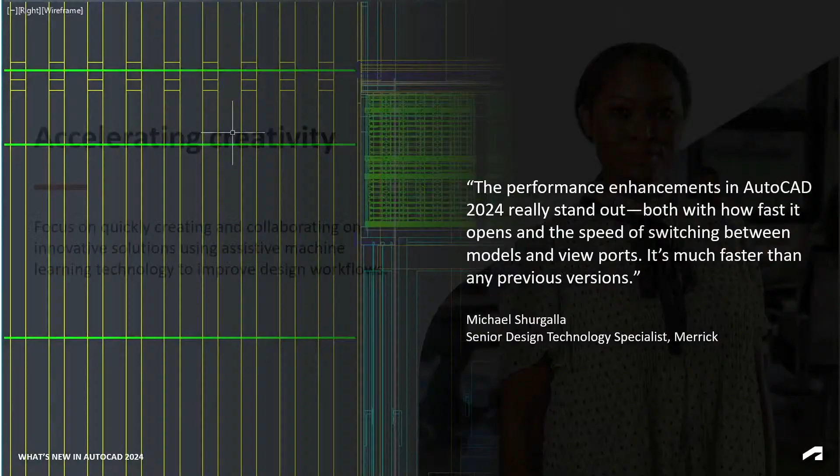With the technology enhancements within AutoCAD, it basically speeds things up when you open and switch between models, taking advantage of newer processing power, etc. So it's much faster than older releases.

The first enhancement I want to highlight is activity insights. It's just a switch that you turn on, and it allows you to record your actions, who did what, in a database outside of AutoCAD. If one person deletes something, it gets recorded, and everybody knows that person worked on the drawing at that date and time, as well as anybody else after that. It basically records who does what.

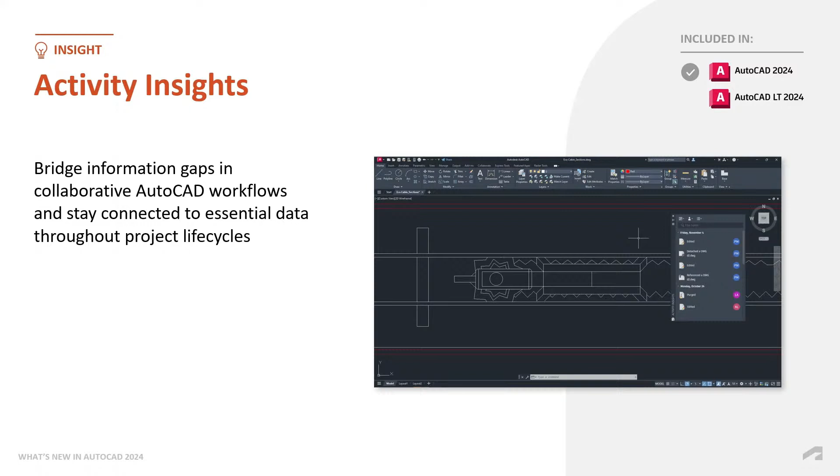It's got a user input, so it knows who opened that drawing and then did what in that drawing. If you rename the drawing in Windows Explorer, it'll also record that in the database. So it runs in the background, and you've got a history of who did what on that drawing, which is great for troubleshooting.

There's also an advisor that learns what you do and suggests how you can improve your workflow. If you're making copies, or copying and then rotating, it might suggest a tool called rotate and copy, which is a sub-command within the rotate command, to copy an object and rotate it. So it might suggest insights to improve productivity.

Some of the automation has been sped up, especially the counting of blocks, as well as the placement and reusing of content. That's been tested, and it's much faster than in previous releases.

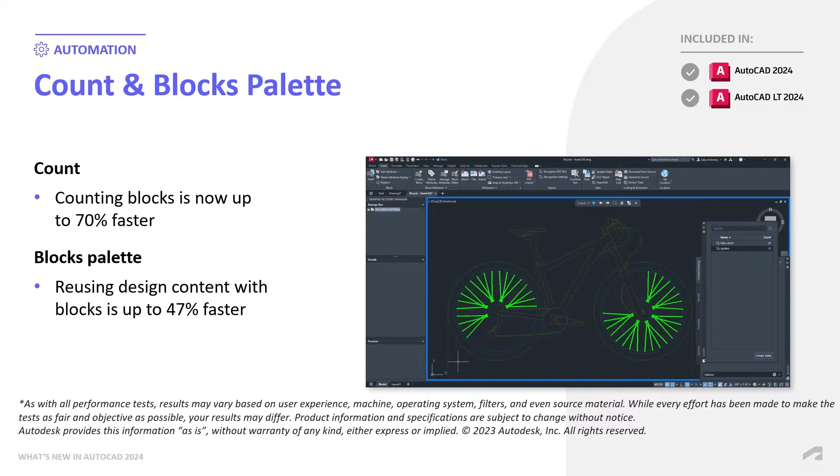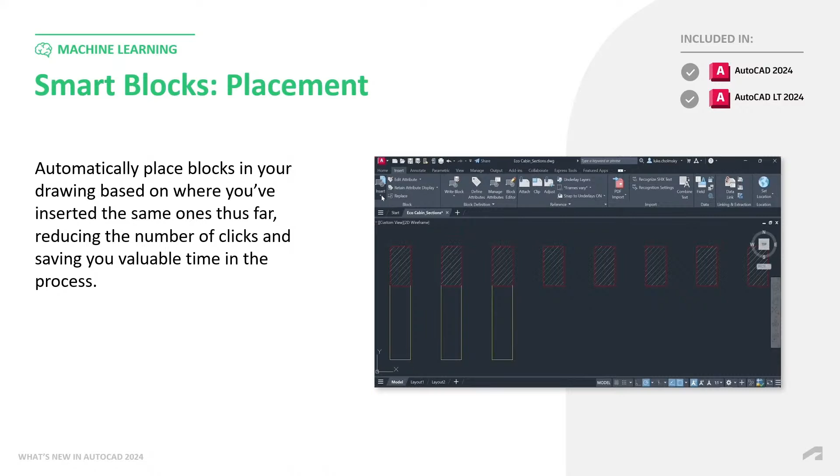There's a great tool. As you tediously place components, AutoCAD actually learns how you place them, and in future, it will just snap into the right spot. This allows you to very quickly add similar blocks that you've placed before. It learns what you're doing and wants to help you place those items in future, snapping to the correct spot when you place the same block in that position, obviously speeding up your workflow.

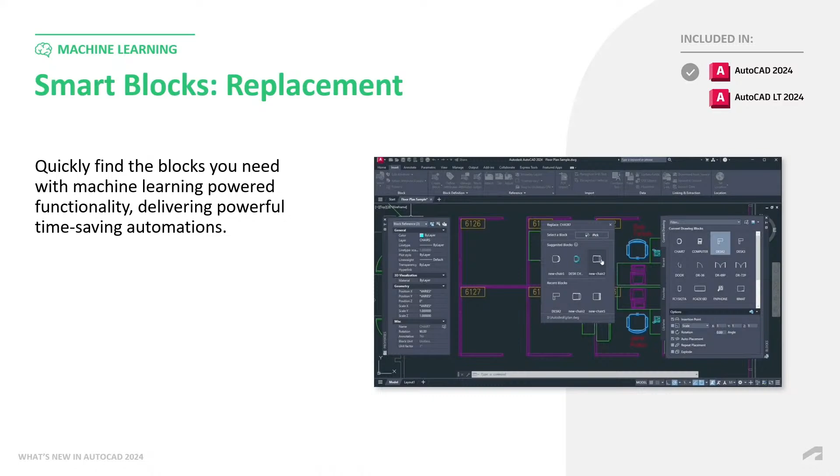There's also the replacement of blocks. It'll suggest placing of blocks, so if you click a chair and you want to replace it, it'll have some suggestions so that you can replace the block if required. There are time-saving tools that, as you select an object and want to place it, will automatically search for other similar items—chairs, in this case—for you to place from. So that's a little bit of the accelerating of workflows.

Now we're looking at tailored functionality, and in particular, they have increased all the tool sets that are available. There are 7 tool sets, and they've done tests showing it increases your workflow if you're in a specific industry by more than 60% using these tool sets.

Right, there's two parts to this. The architectural, engineering and construction toolset is one part, and if you're doing mechanical, electrical and plumbing tasks, you can install the MEP toolset. It has some automation for creating ducts, pipes and cable trays, which you can use to enhance your productivity over vanilla AutoCAD. So use these toolsets and you can really increase your productivity. There's obviously others: architectural, plant, Map 3D, GIS, and also raster design.

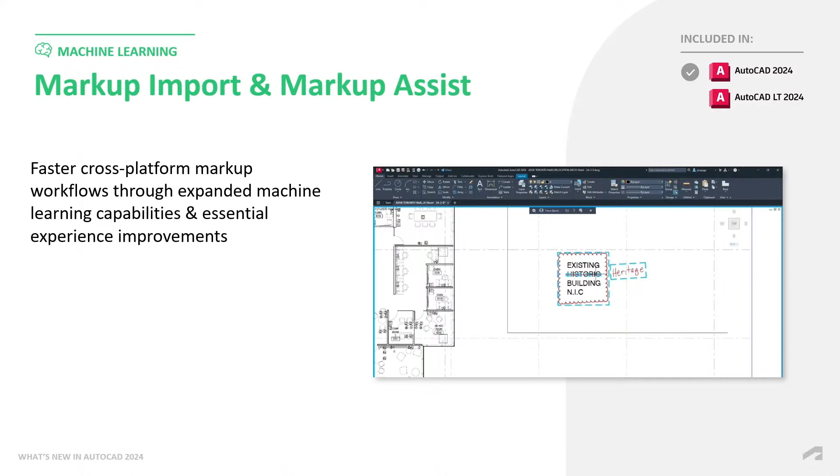With the enhancement of other apps like AutoCAD for web, you can do your markups anywhere. You can even do it by hand, scan it in as a PDF, and then superimpose it over your existing drawings, and AutoCAD will recognize those markups. It recognizes strike-throughs and text, and you can easily just replace that with the markups that it recognizes as text. So there are multiple tasks and enhancements within the markup import and assist toolset.

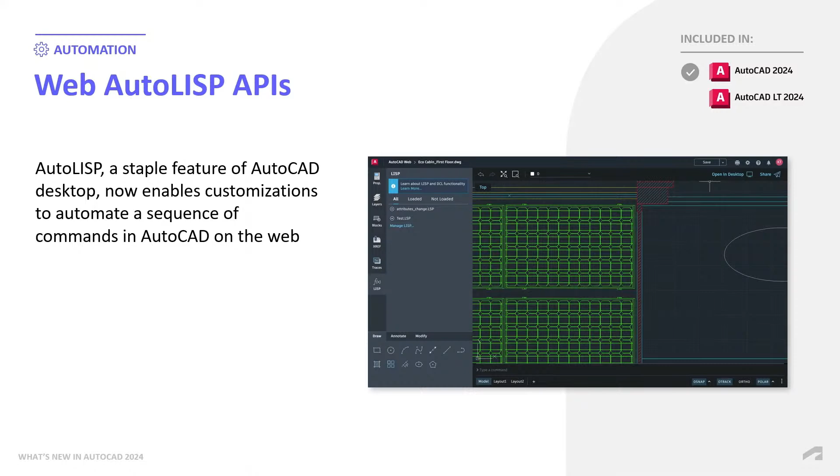And then there's also automation that's now been added, called AutoLisp. It's been around in the full version of AutoCAD for years, but it's now also enabled on AutoCAD web, which is a great enhancement. So you can do automation in your browser with AutoCAD, which is great. AutoLisp has also been added to AutoCAD LT, so you can also do automation in AutoCAD LT, which it never could before.

As I mentioned, AutoCAD for web is now AutoCAD on mobile, so you can at any time edit and mark up drawings on your mobile devices, which increases productivity across the whole ecosystem. A lot of times people are on site, and they can quickly add markups and communicate ideas back to the office.

So that's the AutoCAD portfolio: the full version, the LT version, which is obviously watered down with no 3D and no ability to add third-party apps, and then also AutoCAD for web, which you can use to edit and mark up your AutoCAD drawings.